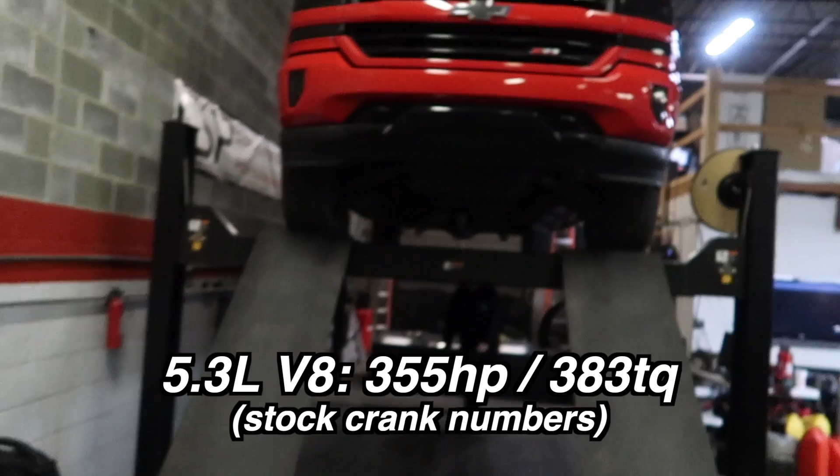So the truck is on the dyno, first time on the CSP dyno, we're gonna see what it makes. Right now it's got an intake and exhaust, that's it, no tune, nothing like that. Boiler induction intake and the exhaust is of course a catback exhaust. We're gonna see what it puts down. I'm not even sure what these trucks put down stock. Now this is the 5.3, not the 6.2. And all the mud does come with the truck, just in case you guys are wondering.

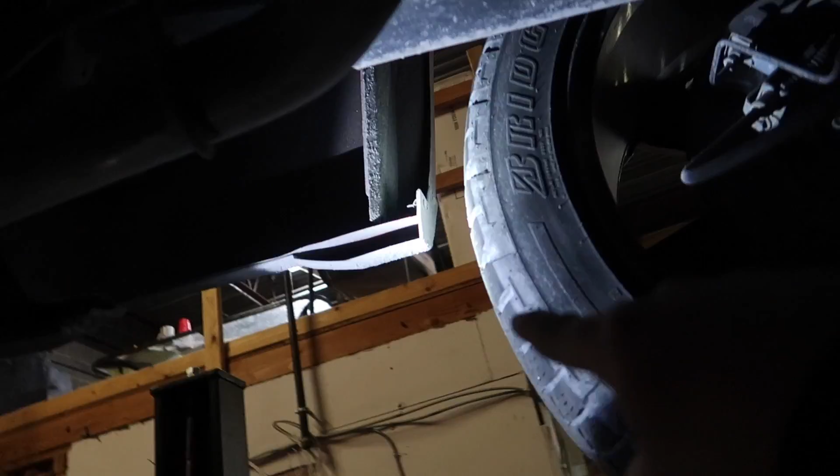Oh yeah, look at that. I like how dirty it is under here. This is called a work truck, and as you can see, everything is completely dirty. This is the off-roading package, the Z71 off-road package. If you look, we're shining the flashlight up there, those little square holes there that are now covered - as you can see with the light shining, that is where the back of my tail lights are. I had to put these pieces of tin and glue them in place so it would protect the back of the taillights, because the original set I had were getting a ton of mud from when I would go into work, and they wouldn't work anymore. So we had to do that. But why wouldn't this be covered on the off-roading package? I mean, there's the back of the tire, and literally everything kicks up on the back of the taillights. It doesn't make any sense.

Conditions at work are terrible. It's all that color because it's all steel dust. If you touch it, you'll get dirty as shit. Just touch a little bit of it. See how it's powdery? Yeah.

Going on the rollers, Andrew. Good. How's the atmosphere up there? Smells like shit. We're about to see how much power this little 5.3 makes.

I'm betting 315 horsepower. I'm gonna bet 321. 305? Okay, wait, we gotta get Alex's vote too. Alex, how much power do you think the truck's gonna put down? 5.3 motor, I'm gonna say 305. Someone already said that, who said that? I said Josh, can't say it. Yep, Josh said 305. I think Alex is a dollar. A dollar? Okay, price is right rules. Oh here we go. So the truck should be fairly cooled down. We've all placed our bets. Let's do it, let's see what happens.

You need a ladder? Yeah. Truck on the dyno for the first time, let's see what she does. Sorry, it's in your way. Yeah. Come on, use your muscles. There you go.

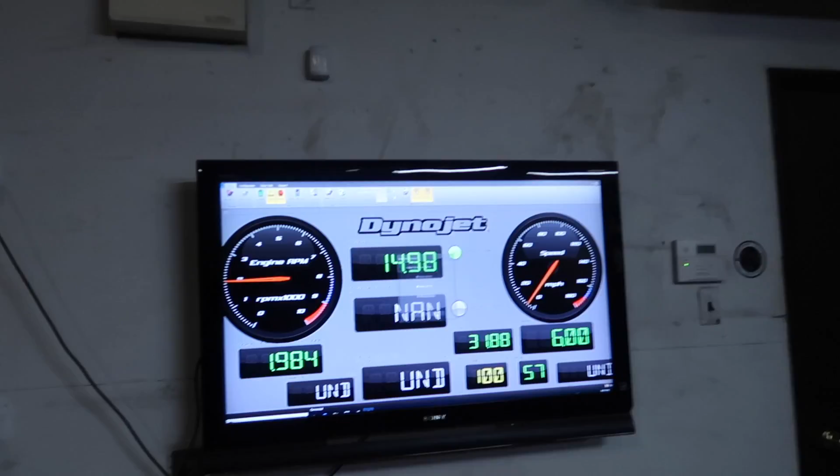Let's see what we got. 293. Alex wins. So 293.

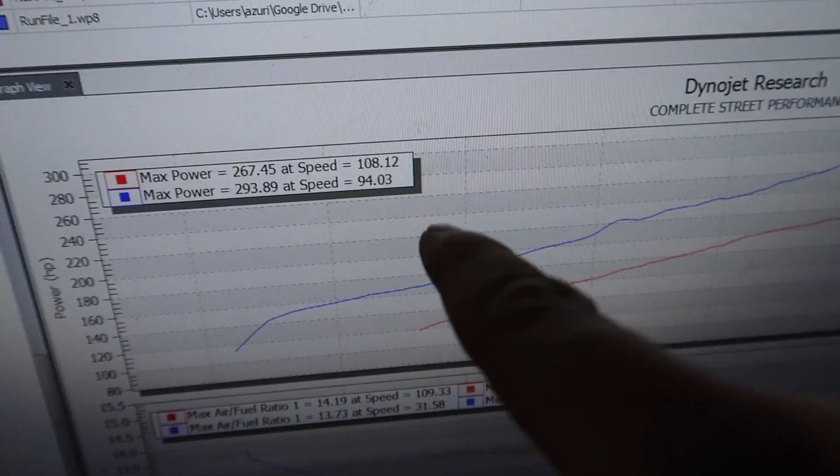Like I said, that first pull, the speed limiter is like 110 miles an hour. So when you dyno it in 4th gear, you can't rev out 4th gear because it limits the speed, and we don't really want to mess with that right now. Third gear went to 102 miles per hour. Let's see, do we have RPM?

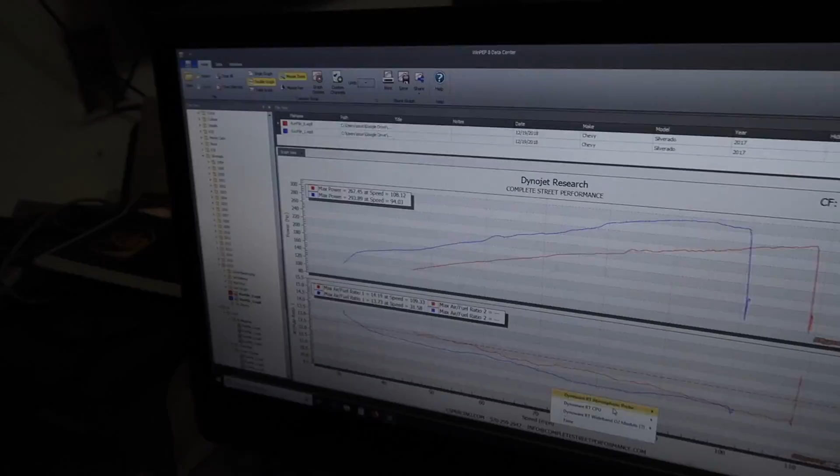Ooh, 316 torque. Got the torque right. Yeah, so it's actually pretty close. Like if you look at it, they're roughly the same. The dyno does a good job in any gear, it kind of works out well. But the higher the gear, you start getting into the rotational mass of the tire fighting you to accelerate.

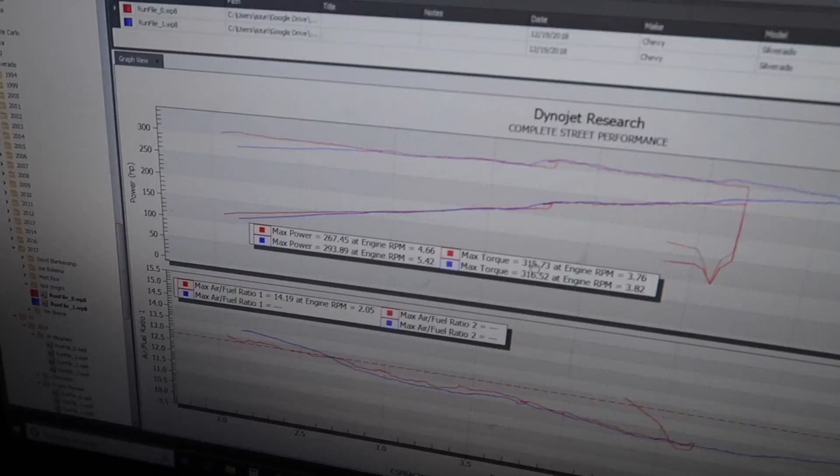Wait a second, wait a second. Change it to standard, maybe somebody else will win. No, let's let Alex have this one. Okay, Alex wins. Yeah, Alex wins this one. Okay, now I'm gonna change it to standard.

The lowest horsepower I've ever made. There it is, guys. 293. Oh, what's it doing standard? Here we go, 302, 302. Oh, Alex still wins, Alex still wins.

We should clean the air filter and see what it puts down. Is the air filter really that bad? Did you see the engine bay? No, well, I didn't even look. Holy shit, man, it's like you drove this down to Florida or something. It's like I drive it to work or something. It's like he actually uses it or something.

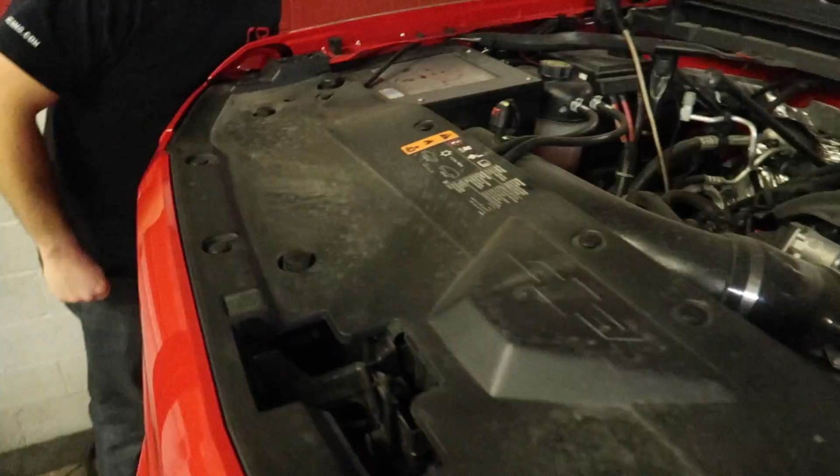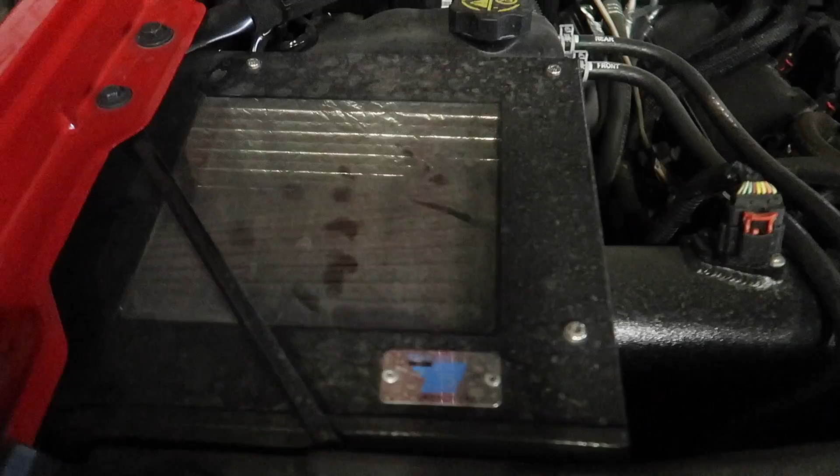Oh, it's an oiled filter. Yeah, so you can't actually clean it, you have to actually hose it down and oil it. And then I wonder how dirty it actually is though. It's gotta be, it's gotta be extremely dirty. So we throwing a tune on it?

Okay, performance tune? Yeah, clean the air filter. Let's just put a tune on it and see what happens. I want to beat some Honda Civics, man, with my truck. Well, we're gonna do a performance tune and then a regular tune for when I'm towing.

Do you want to do like just a 93 tune? So I just put 93 in the truck? What do you have in it right now? 93. Oh, that's great, just plus 7. There you go, let's see what happens.

Yeah, if you got 93 in it, I'm gonna just add 5 degrees of timing and see what happens. Since I am gonna be towing with the truck, do you think it'll help it or hurt it more with this tune? This would not be great for towing, man. When you tow the Freedom Rocket, you're gonna find that the resistance is so great that you're probably gonna want to just drop back down for safety's sake. It might do great on the dyno, but it might not be reasonable for towing.

Okay, let's see if this thing blows up. Okay, blow it up, you buy it. For $1.

304 and 329. 293, 304, and from 316 to 329. You make more, I'm gonna add 5 more degrees of timing. Oh my God, we're gonna be at 37 degrees of timing. Just kidding, not really, 2 degrees does.

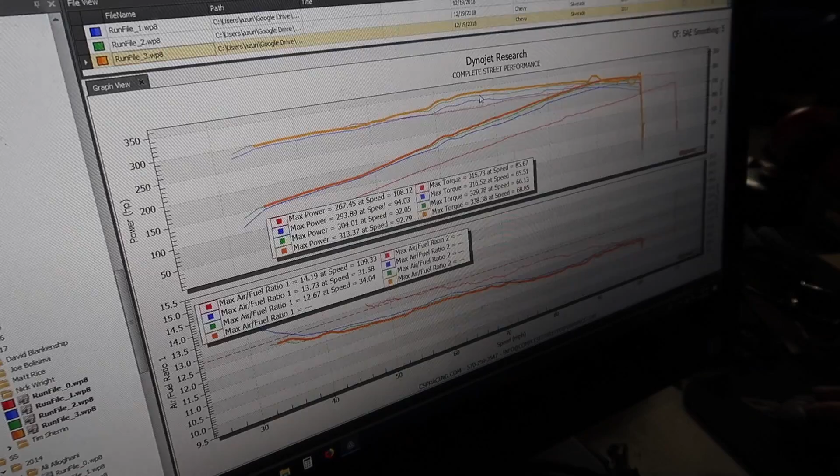Oh wow, 313. I was wrong. Holy crap, look at that gain. Solid gains, let's see what it looks like by speed. 313 is legit, the torque is legit too. It's just RPM kind of goofed up top, so yeah. This is the gains that we're seeing already from 93 octane and a tune.

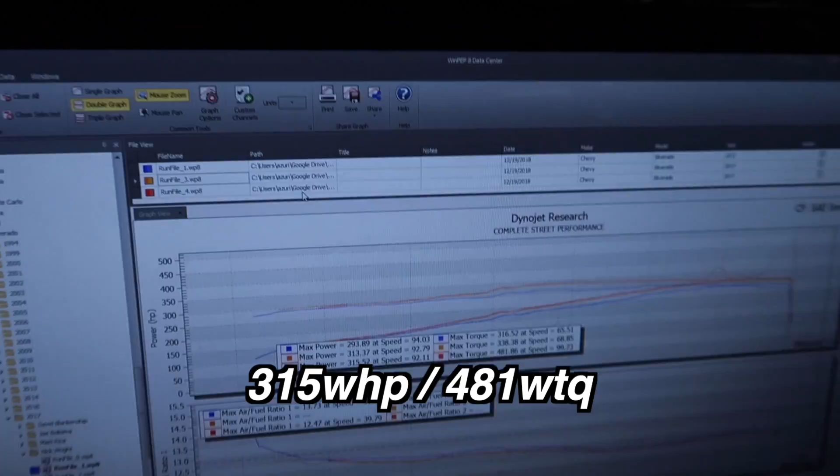315, 481 torque, that's wrong. Well, I don't think those 2 degrees are worth it. The peak torque is actually 341, so it did gain some. Yeah, I'm gonna take those 2 degrees back out though. It's not worth it, not worth it, yeah.

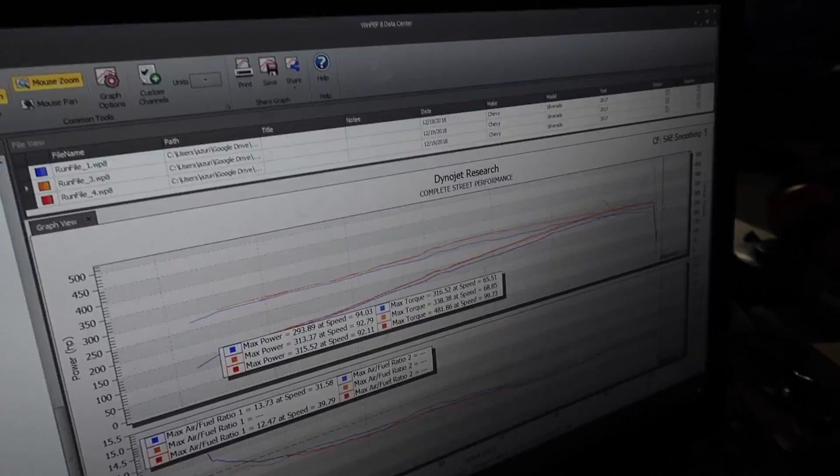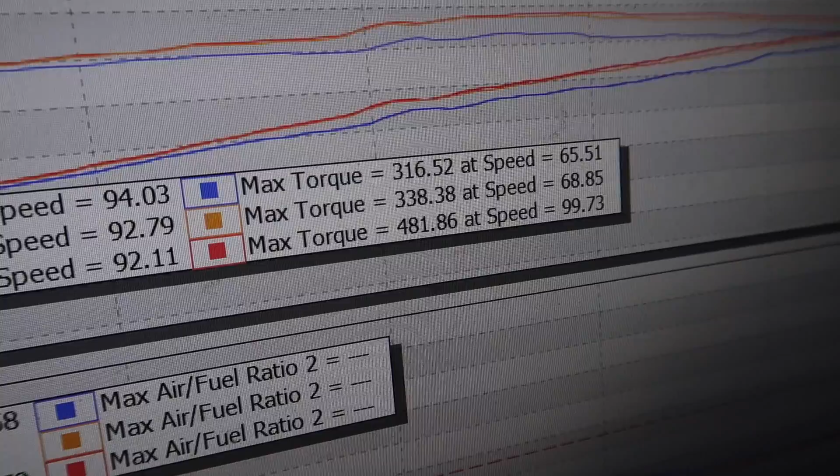293 was with just no tune. 313 is with the tune. We gained about 20 horsepower. We're going by the 338 number there. So we gained about 22 wheel torque, which is cool from just a 93 tune, yeah.

Well, there you have it guys, 315 horsepower. When you have an eye twitch in one of your eyelids, that's what it looks like the truck has right now. I hate when that happens, like when your eyelid just starts twitching randomly and you're like, yeah, I hate that.

What do you think? I think we should go blow it up on the street.

So I was saying, guys, the front part of the truck here, the votes are in on Instagram. I posted a photo, kind of like a tell me what I should do photo, because I couldn't decide for myself, and everybody said to keep it how it is. So I think that's what I'm gonna do.

I got these coupons and I was gonna put them in my glove box, and look what I found in here. Freaking teriyaki beef jerky from when we went to Florida. My friend Mark must have put them in there and forgot they were still in there.

That's pretty funny. So you're not gonna be able to log any of this? No, Andrew's laptop just died. I've been tuning all day.

Watch this corner, man. This isn't a Camaro. Andrew's out here taking corners like he's in his ZL1.

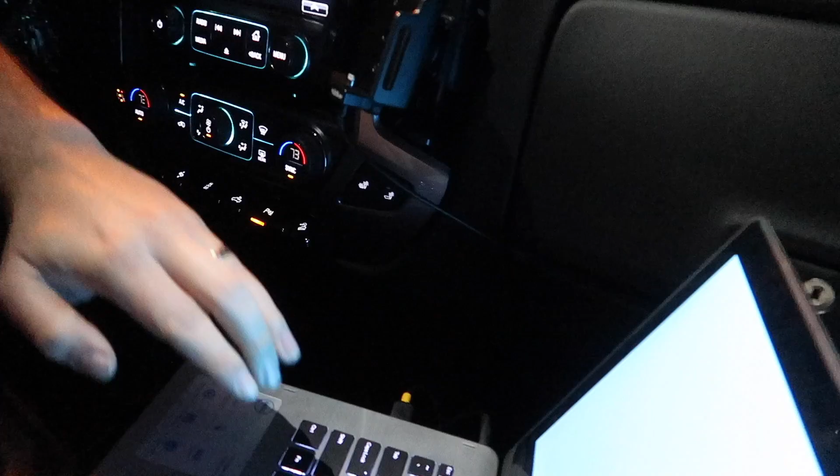All right, so now we got the laptop plugged in. This is my truck, take two. My truck has a regular outlet, which is nice, so you got your charger plugged in there. Look at that mug, Jesus, my God.

Literally most of our tuning on any of my vehicles has been at night. You notice that? Well, that's because you don't get here till like 4 o'clock. Yeah, because God forbid I work a day job.

So what are you doing? Well, there's this thing called brake torque management, and it's basically how much your throttle body is going to open, or how much torque it's going to allow before or when you have the brake pressed at the same time. It's kind of to protect you from going stupid if your throttle body sticks open, or some problem happens with your pedal.

So let's see, is it fixed? Oh yeah. Is it in 4-wheel drive? Oh yeah, dang, this thing does get up and go, man. Yeah, it's definitely having a bit more fun now.

Okay, so what are we gonna do now? I'm just gonna punch it.

You know, I think now the brake makes more sense. Just look at it, look how high it gets. It's like stalled at like 2600. Oh my God, I love it. You don't even need a stall converter. Yeah, this thing will do burnouts for days now.

So everything checked out clean with the log. Andrew removed some of the brake torque management. Now we can do digs on the street, call out some Honda Civics, call out my own car that can't get out of the hole fast without a converter. Yeah, it's not going anywhere right now.